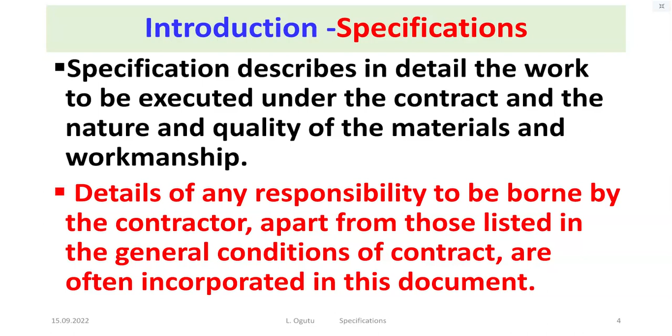Specification may also contain clauses specifying the order in which various sections of the work are to be carried out. This will be in the specification. It will also detail the methods to be adopted in the execution of the work, which I've already mentioned, and any special facilities to be afforded to other contractors.

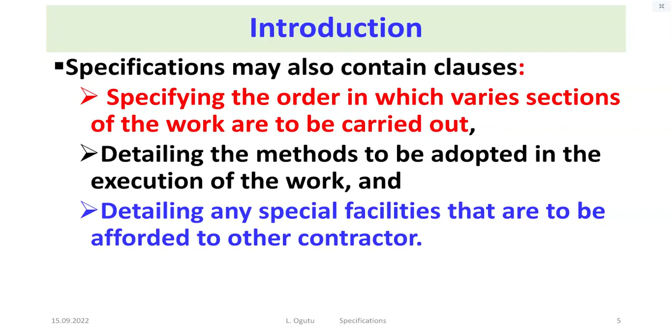So a specification is a very important aspect in our civil works. It is one of the contract documents I have mentioned in civil engineering work. There's no way you can bid for anything without that specification, so that you achieve what you require.

Gabriel Jr. is asking whether specification of the works would be wholly dependent on the financial capability of the client. I think Junior is trying to say: would the specification of the works not be wholly dependent on the financial capability of the client?

One thing you should take into consideration, Mr. Gabriel, is that during the design period, the engineer liaises closely with the client to ensure that whatever is being done is capable of being afforded. So there's a lot of liaison between the engineer and the client during the preparation of these documents.

In most cases, ladies and gentlemen, the engineer will only proceed when the client gives an okay to one particular stage. There are so many stages before we reach this particular point, and maybe we can discuss that in engineering management. That means there's a feasibility study which has to be done to see whether that project is going to be viable or not, to see whether the client can be able to afford it or not.

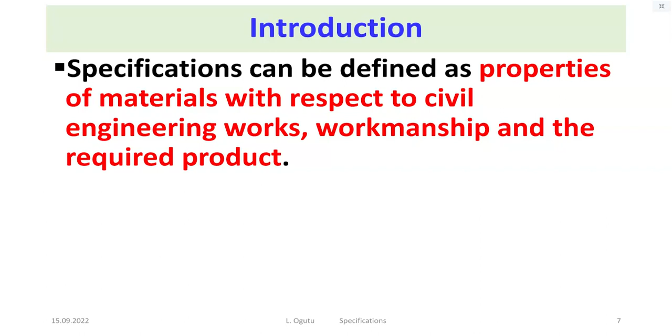So we shall see how to deal with these ones in our future lectures. Also, ideally, specification is prepared by the engineer to provide written technical information, mainly on the quality of the materials and the workmanship. So I've already mentioned that one to you. Specification is an explicit set of requirements to be satisfied by a material, design, product, or service.

I think you will actually look at some roads. If you look at roads class A, you find that they have a specification that they are rather thicker. But if you look at roads class C, they have a very small amount of tarmac, and within a very short time they are already worn out. So even in the road sector we have this specification - I'm sure those who deal with highways know about this one. Although when I was young, if I saw a tarmac road, I thought they were all the same. No, according to the class, they have different specifications. This is why you find that for the lower classes, they wear faster than the higher classes, because the specification is not as stringent as the other particular aspects.

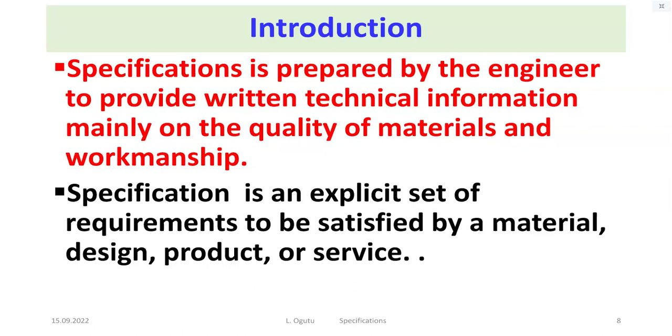So specification is an explicit set of requirements to be satisfied by a material, design, product, or service. I think now you are understanding the need for specification. In structural drawings, ladies and gentlemen, shape and size of different components are clearly mentioned in the document. But it is not possible sometimes to show workmanship in the drawings and the rest. So these ones now come under the specification, just as I've said in my slide. In structural drawing, shape and size of different components are clearly mentioned, but it is not possible to give details about the materials and the workmanship of the work, or the methods, tools, and plants to complete the work.

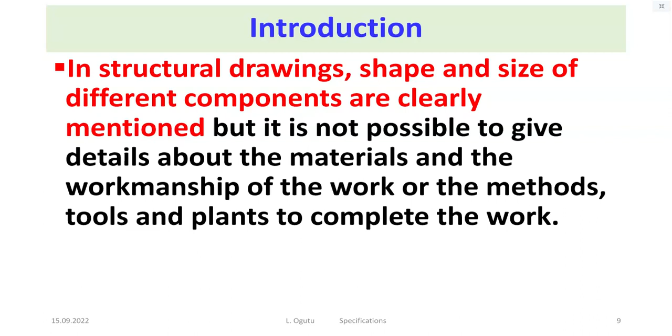So all this will come under the specification. If you look at the structural drawings, you cannot show everything there. Then the specification must be accompanied with that particular aspect. Just for an example, ladies and gentlemen, in a drawing it is clear that plastering is to be done on the walls, but it is not clear what should be the thickness of the plaster, or how many coats of paint are required. So all these come under the specification. The drawings are short of these details. Drawings give a guideline, but the specification should be complete in its totality.

I think when I was young, things were easier. When there was a contract and you wanted some material to read, you'd just go and pretend that you were also a contractor, and then you'd be given those materials, and you wouldn't return them. But these days, when you want this, you must make some payment before you can get it, ladies and gentlemen. It's not as free as it used to be a long time ago. Nowadays, you must pay some initial amount of money before these documents can be released to you.

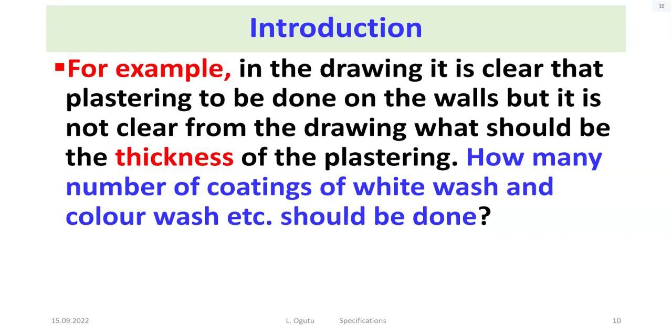Sometimes some people think that the BQ is complete. No, the BQ is not complete. The BQ just tells what is required. We shall see samples of the BQ, and we shall also see samples of the specifications.

Like I mentioned, if you take foundation work, ladies and gentlemen, when you try to give the specification, you start from the clearance of the site. How should it be done? Where should you take those things which you have cleared? Then from there you can proceed. How do you take out the topsoil? You realize this topsoil should not be thrown away because you might need it later on. In the specification, you will say where it is going to be placed. So all these things are required, and the specification will tell you exactly what you will do after the end.

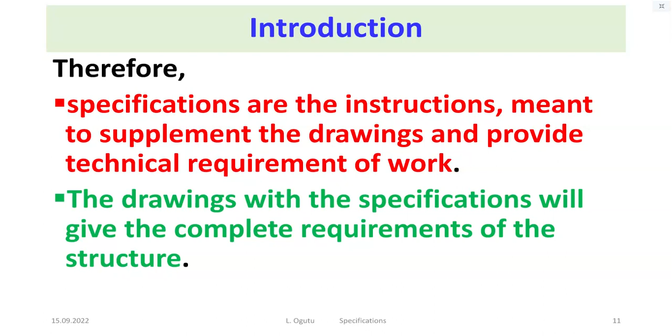But I think we shall go into more detail later, ladies and gentlemen. Today I just wanted to mention the meaning of specification, and from there we shall take it up. I've already mentioned the purpose of specifications, but now let us look at it and conclude by examining what is really the purpose of specification. From my talk, I think you have now gathered what is really the purpose of specification.

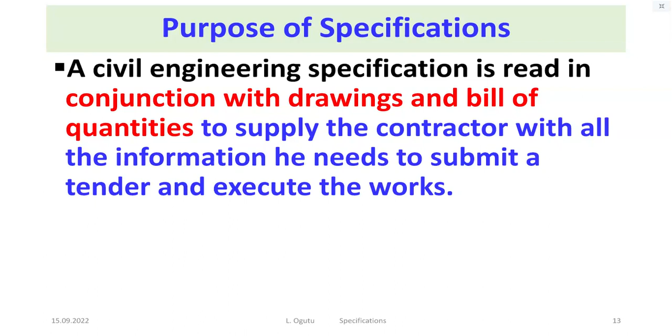A civil engineering specification is read in conjunction with the drawings and bill of quantities to supply the contractor with all the information he needs to submit a tender and execute the works. That means specification is an important aspect in terms of the procurement and construction period—a very important aspect in one case or the other. The main function of the specification is to describe fully the workmanship and materials required to carry out the contract. It forms, in fact, a schedule of instructions to the contractor and will, to a large extent, determine the quality of the executed job.

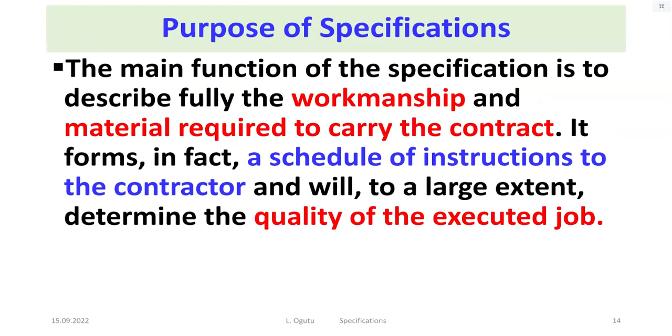So that means specification shows and gives us the final aspect required from any job. It's a very important document, this specification. If carefully followed, the quantity and quality of work will be assured. That means if Chomba Construction Company is doing some job, and also a junior construction company is doing some job, if you give them the specification, they should end up with the same outcome, ladies and gentlemen.

This is actually what is required in this particular case. I used to joke with one of the class reps, I think two years ago. I think he has already gone. He used to be a very good person. So I used to say that he is a contractor, I'm just forgetting the name. He used to do a very good job, ladies and I'm sure in the end he may be a contractor, because I really portrayed him as a contractor. He was looking like a contractor, he was behaving like a contractor, in a very nice way. So I will only describe Mr. Chomba once he has left, but now I cannot describe him. So, ladies and gentlemen, if carefully followed, the quantity and the quality... I think you have now got it, Potters. Thank you very much, Mr. Chomba. And I think that person was very good.

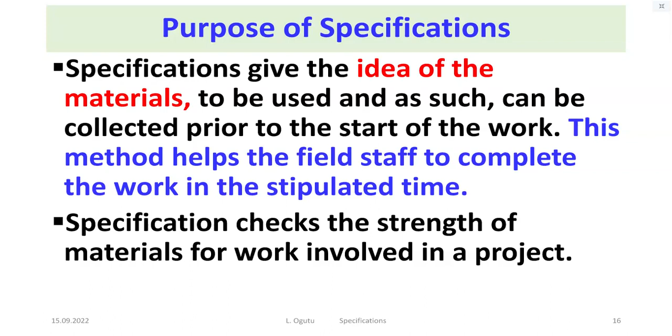So specifications give the idea of the materials to be used, and as such can be collected prior to the start of the work. This method helps the field staff to complete the work in a stipulated time. Specification checks the strength of materials for work involved in a project.

I think that is actually quite a specific aspect. Then the cost of unit quantity of work is governed by specifications - this is true, ladies and gentlemen. Later on, when we discuss this, I'll mention how you come to the cost of the unit. One way is that before you tender for your work, you go to whoever is dealing with the cement, they give you the cost. You keep getting the cost from other bits, and then you build up your unit cost. But most of our African contracting companies wait until it is two or three days to the deadline, then they sit down on the table and say, this one we'll do like that.

Can we add a bit of the percentage? No, no, no, no. You must get the thing there so that your unit cost becomes realistic. There's one thing we shall see later on: if you're dealing with this, you can always make a mistake and forget one area to put the unit cost. But in terms of contract management, if you don't put the unit cost there, it is assumed that was your secret of actually getting the job.

So you will do that job, but you will not be paid according to that. In terms of construction management, it's very funny. If you forget to put a unit cost somewhere and you become the most responsive bid, you'll be given the job, but when you're doing the job where you did not put the unit cost, you will not be paid. It's assumed that you had covered that cost somewhere else, and that was a technique for you to win the whole thing. So we shall see how we deal with this later on.

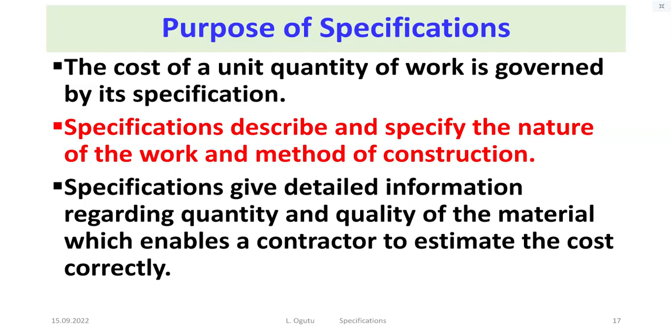It gives detailed information regarding the equipment, tools, and plants to complete the project, which enables us to procure them beforehand in time. So that's when equipment are also required.

But then there's a provision, because not all constructors might have this equipment. Then you can actually lease equipment from another company, but during the bidding, you give a letter showing that you are going to lease this one. Once you have leased it, you get this plastic badge and you put it on those lorries.

So everybody might think that Chomba Construction Company is so big that it has got so many lorries. Some of them would not be Chomba's, but it's only that they put the plastic badge showing Chomba. Those lorries could be belonging to somebody else under the lease agreements. All these things are practicable.

So cost of work depends mainly on the specification. If specifications are changed, the cost of work is also changed. Specifications give a correct idea about the estimated cost so that funds can be arranged accordingly.

I think I'd already mentioned to Junior in this case that specifications are quite ideal and correspond to the cost. Any change of those ones brings in a problem. We shall see later on under the conditions of contract.

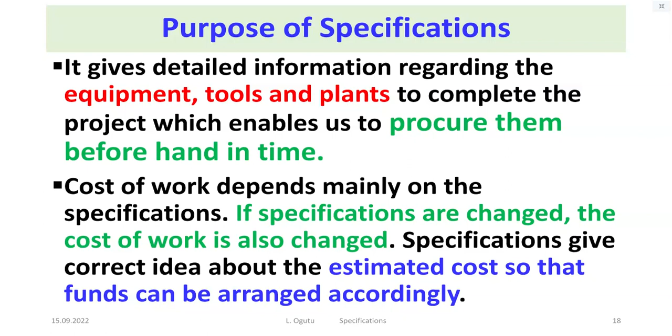So I think that answers Mr. Gabriel's question.

Specifications may be required for court cases as evidence in a dispute. In case you decide to go to court, though we always recommend arbitration, specification is a very important document. It will be deposited in the court, and the court will put their judgment in regard to the specifications which are allowed.

But as I mentioned, in civil engineering works there's no need to go for litigation, because this will take so many years, and by the time it gets finished, your money is also finished. It is good you go for arbitration, which is very fast and confidential, so your name is not tarnished. People will think you are so holy, yet you are not, but it is not actually given to the public.

Specification is a demonstration of statutory compliance. That means in a court of law it can function, and it should indicate whether you are in compliance with the work which is done. If you do something according to the specification, then you are actually complying.

So specification is a project management aid. If you are managing the project, specification can have a very important aspect. So the specification acts as an on-site manual which can assist in that particular aspect.